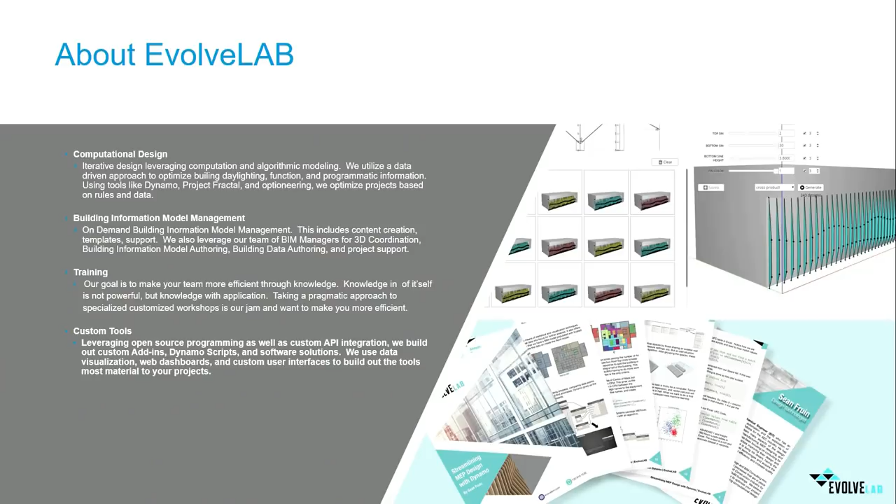Highlighting the client today, we're going to be talking a lot about DTJ Design. They're a client in Boulder, Colorado, my hood, backyard. They do a lot of really cool stuff in the architecture and landscape space. Probably one of the best landscape design companies I've ever seen. Really, really impressive stuff.

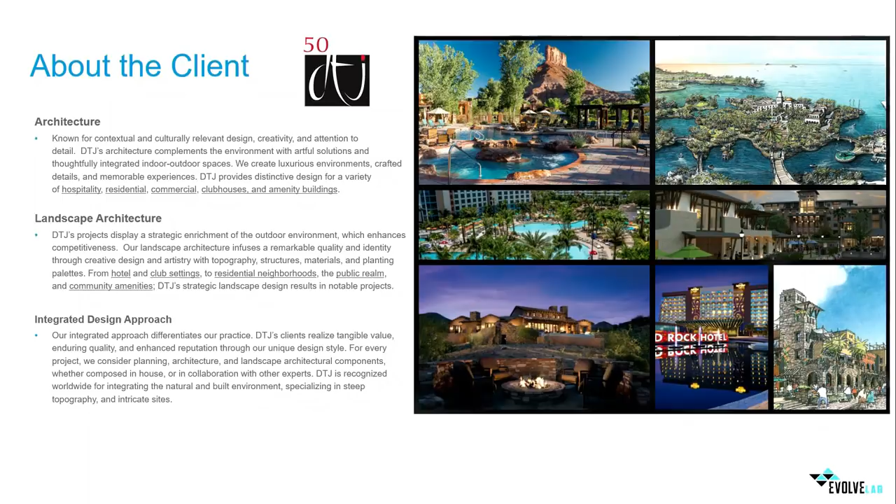Today we're going to be looking at understanding what challenges come with adopting BIM for unconventional projects, learning how to use multiple BIM platforms to synergistically overcome performance issues, learning how to capitalize on BIM for large unconventional projects, and learning what best practices exist for managing complex geometry.

So, an introduction to this. I basically was getting beers with the principal at DTJ Design probably 4 years ago, and he's like, 'Hey Bill, we're getting ready to implement BIM in our firm.' And I'm like, 'Cool, I can help you out with that.' He's like, 'Yeah, we're trying to set up our Revit templates and content and start working on projects.' I'm like, 'Sweet, we can do that.'

So I went into the office and they were like, 'Hey, we're doing this Revit implementation.' And they started showing me the types of projects they worked on. They're showing me these cupcake buildings and these crazy water slides and crazy mountains that they design. And I started scratching my head and getting super anxious and nervous.

And I'm like, 'Okay, can we start with like a multifamily? Like, can we do a townhouse?' And they're like, 'No, these are the projects that have the budget, and we're gonna do it on this. Can you do it?' And I'm like, 'Yes, I can do it.' And in my head I'm like, 'How the hell am I gonna do this?'

And so we started looking at these different projects, starting to understand their process, interviewing their landscape team, interviewing their architectural team, and trying to see how we could start using BIM on some of these crazy projects.

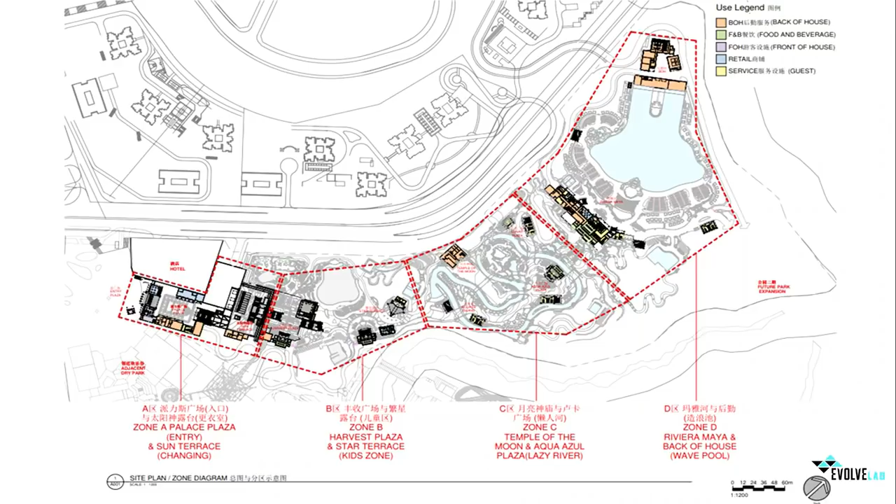Crazy enough, one of the weirdest challenges we had was just simple CAD exports. I thought, easy, we could totally do this, but there were certain ways the landscape team was used to working in AutoCAD with the architecture team. Trying to get exports to show up correctly, with certain information on or off—specifically, for those familiar with the Revit view range, trying to set up where building exports were going to be for a specific cut range was actually really challenging. We had to go building by building, understand where they wanted to see rock work interfacing with the building, and make sure those exports showed up correctly. That was one of the challenges I really didn't expect.

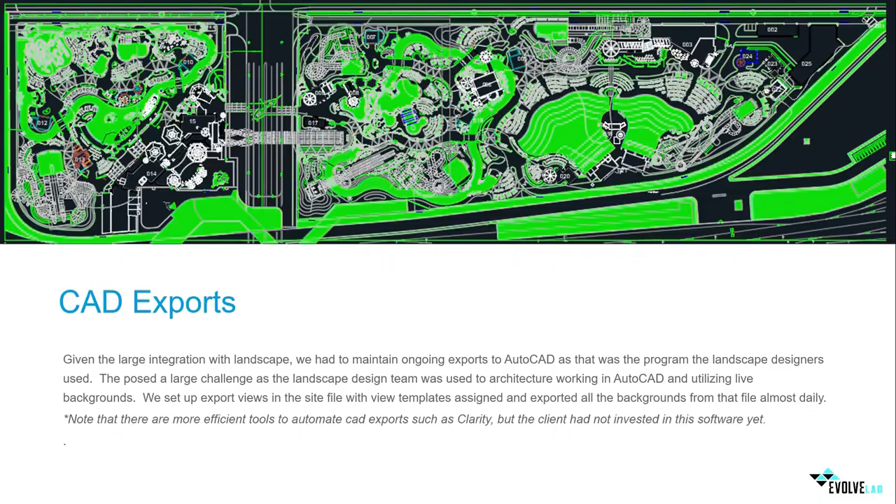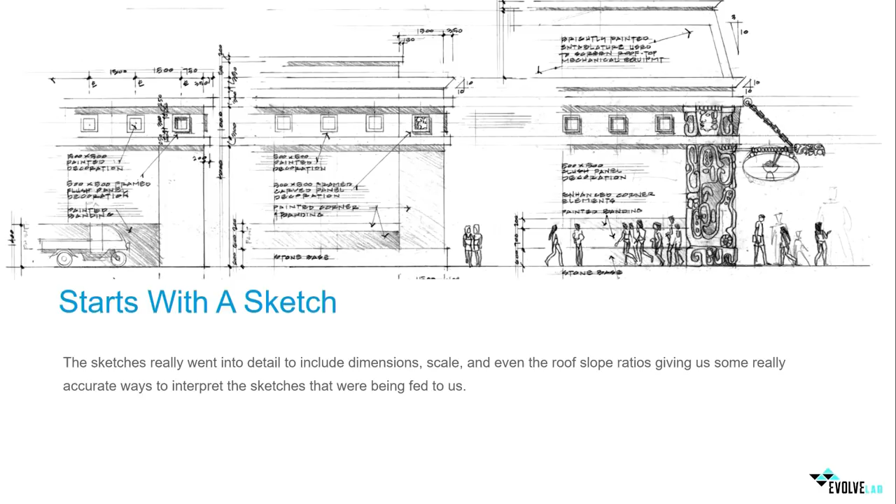The way a lot of these projects start is with a sketch. These guys are some of the most talented artists I've ever seen, with crazy sketches. They start with these sketches and put very detailed information in—roof pitches, dimensions, theming comments, things they want incorporated into the project. Our goal was basically to take any one of these sketches and Revitize them. So on the left you have the sketch, and on the right is that Revit building information model.

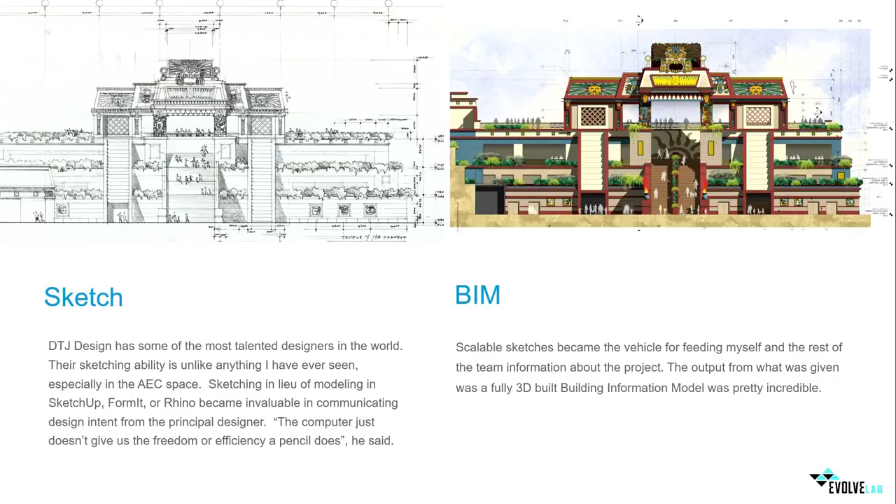Our process had to be very fast—these projects have a very tight turnaround. So we set up a post-processing process with Photoshop: we had layers in Photoshop, we'd feed these artists the backgrounds, and they would add people, entourage, things like that. One of the questions we kept asking ourselves was, there was so much art and decorative elements, how much of this do we want to do in Photoshop, and how much do we want to put in the building information model? There was constant tension trying to think about whether it's faster to do it in Photoshop or faster to apply these materials and objects within Revit.

With this process we basically took a less-is-more approach, applying materials. They had different art pieces and sketches throughout the project, and we started using decals to apply this—this will get more progressive, this is the first one, we'll have two more. We wanted to apply these different images to the building, starting with decals. One challenge with decals is that with any non-rectangular shape, you get black lines floating outside the building. That process fell short really fast. So instead we created different materials within the Revit library and painted the face on some of these. We also created a bunch of geometry related to sweeps and extrusions for roof pitches, as well as a lot of the columns.

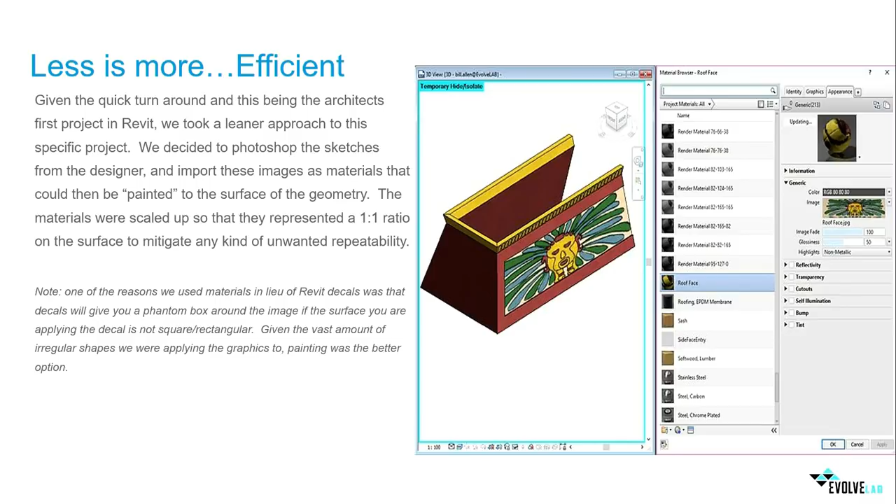The other task I was challenged with was going through and creating very unconventional geometry. I had to model a railing that existed throughout the whole project, and the Revit railing tool just wasn't going to cut it for these ornamental balusters. So we created line-based generic model families that were parametric, and applied those throughout the project—that was really critical. We used simple formulas for those, applying the materials and populating them throughout the project.

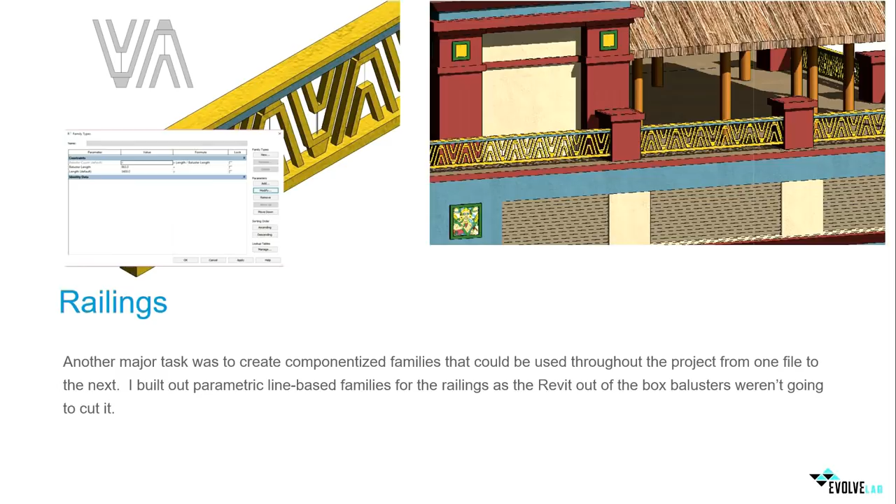We also did this with quite a few different decorative components, different fascias, things like that. I would create all these Revit families and distribute them throughout the team, and they would use them throughout the project. Any questions they had, I'd try to support them and make sure they had what they needed. There are tons of different decorative elements that existed—very unconventional, not your typical Revit roof or fascia.

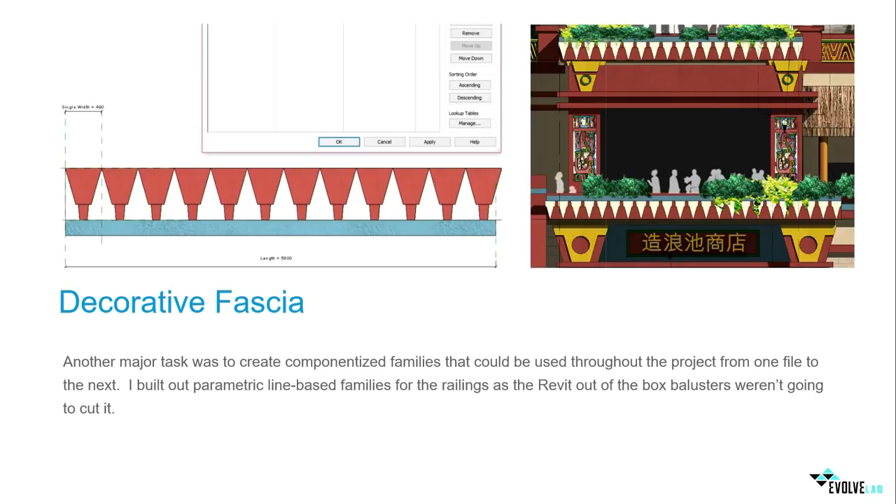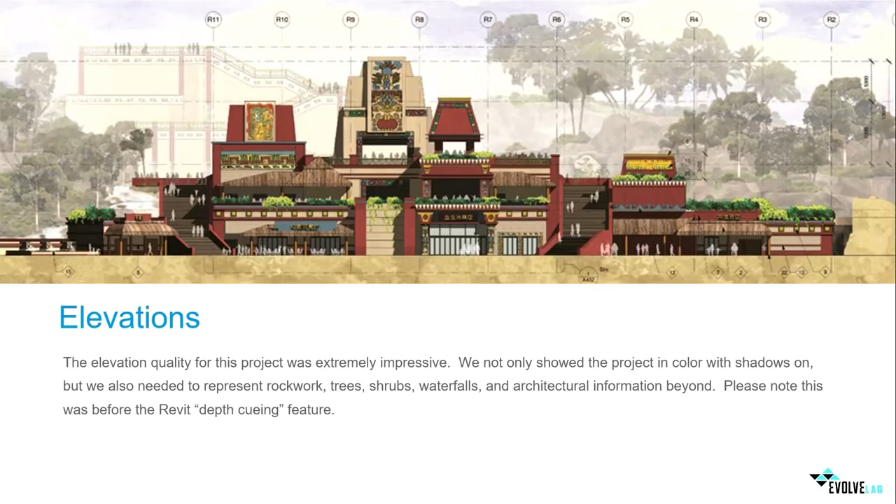We also had to illustrate these elevations. Going through the process—this was before Revit had the depth cueing feature, where you can change the fading or gradient for imagery in the background. So what we ended up doing was illustrating, cutting these as different elevations, bringing them into Photoshop, and changing the transparency. There was a lot of rock work, theming, and entourage, so it was a constant tension of what to model versus what to Photoshop.

This is an image of the building that had the third largest wave pool in the world. Through here they had this stage and a bunch of functional programmatic information in the back—how the space was going to function, the staging, the theming, how the actors were going to come out, and this massive TV that was going to be here. We had to organize all of that with the various AV consultants.

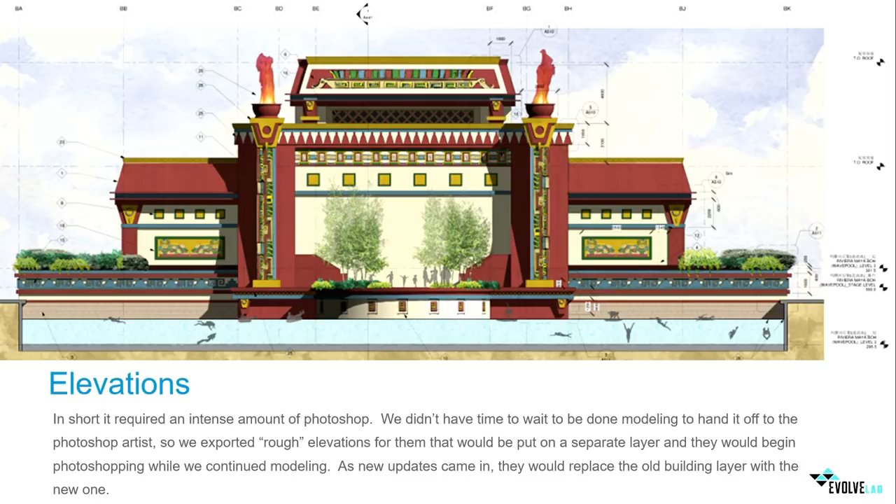This is an example of some of the isometrics we illustrated. This is where the point of what you Photoshop versus what you put in the model really comes into play. A lot of this information we wanted to show up in these views, but if we had to Photoshop it, that was just going to be a nightmare.

It's worth mentioning a lot of these projects only go through schematic design, then get handed off to an architect of record—over in China for this one specifically. So we were only going to take it so far, and we had to understand how much time to invest in modeling versus letting it be translated over to the architects of record. In this example, if we were Photoshopping everything, it would have lost a lot of the value of these isometrics.

So we really wanted to make sure we were using a modeling effort, applying materials, actually putting this information in the model so we could get these types of isometrics. We used keynoting, tagging, and embedded data for all the smart documentation you use with Revit on these projects.

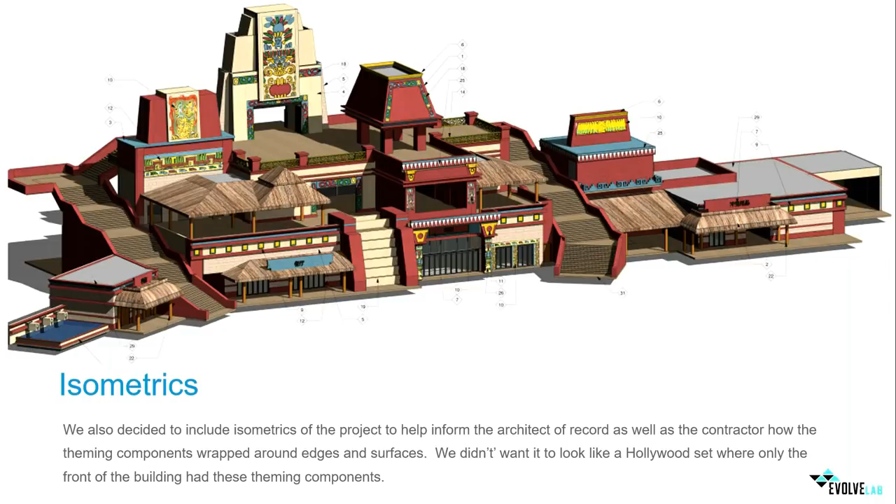This building specifically was one I had to work on. It had one of the largest grade drops, as I mentioned at the beginning, but this specific area was insane—they had this massive escalator and then stairs, creating a huge drop from one side to the bottom. We had some really interesting architecture up on the top. Going through this process, one of the challenges was, again, a lot of unconventional geometry, like these roof structures that existed over the escalator.

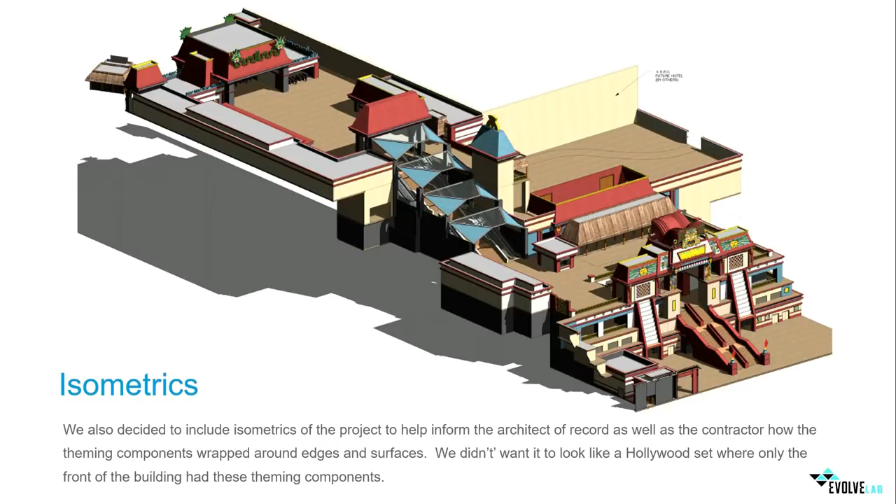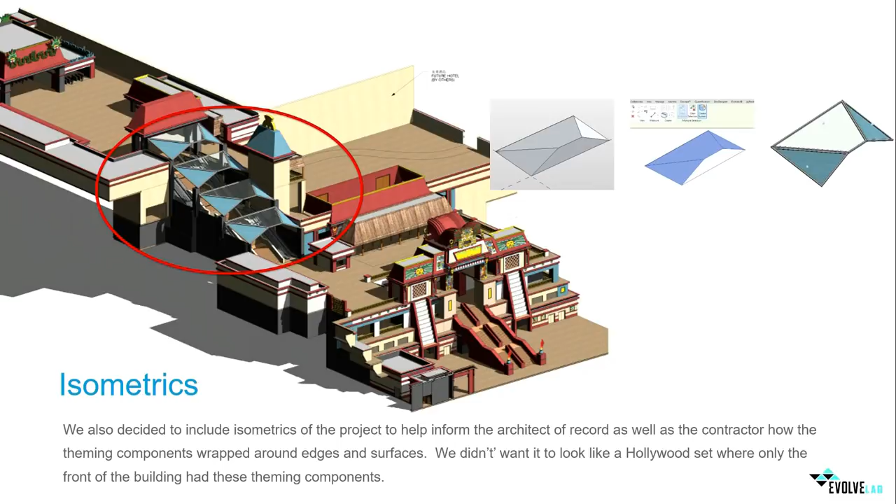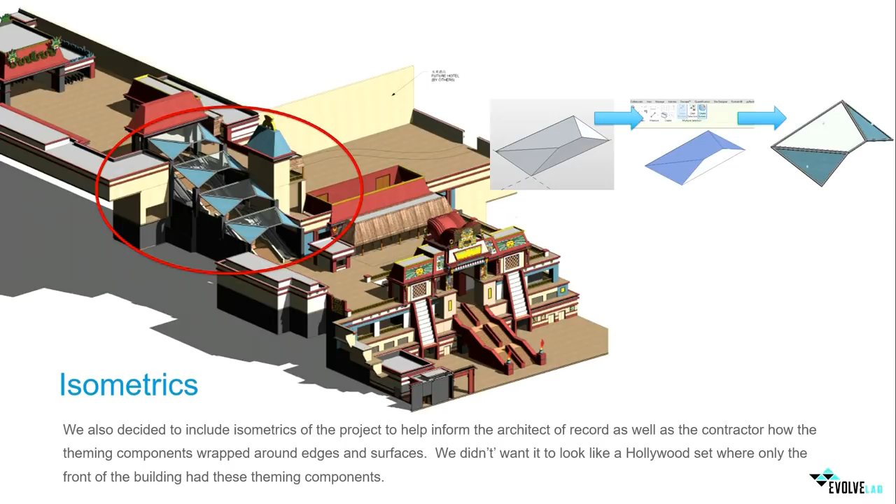A process I used a lot in hospitals, which you're probably familiar with, is to create a conceptual mass family, make it parametric, bring it into your Revit model, and then do a curtain wall by face or curtain system by face. That was one of the processes we used for modeling some of these structures—using the Revit Conceptual Massing environment. I call that Autodesk's best kept secret. Even people who've used Revit for 10 years have no idea it exists. So for those who don't know, that's the Revit Conceptual Massing environment.

We also had all these canopy shade structures, and we were trying to figure out the process for applying a lot of this imagery to these models. So what we would do is actually use a lot of the models in realistic view just to try to get the materials to show up.

This posed a huge issue for performance. The models got very, very slow, especially with the size of these building files. So we would constantly go back and forth between hidden line and realistic mode, trying to get the presentations done but also trying to model. Some of this stuff we had to see in realistic mode so we could model. That became a really big challenge for us personally.

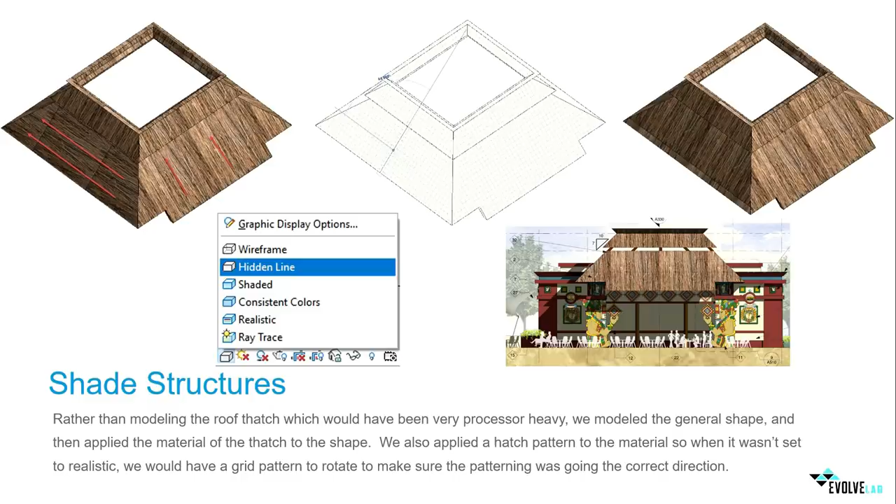We also had these crazy columns, like figures holding corn and diamonds and all kinds of crazy stuff, and I was trying to figure out how in the world we were going to model some of these decorative elements. The way we did that specifically on this project is I used the wall profile tool. It gave us these cutouts, which was a very tedious process - I'll show a better way to do this in a little bit. Basically we did a wall profile, cut it out, applied the material to it, and that gave us our elevations and isometrics.

For this part, we had to go through detailing, dimensioning, and documenting this information. You'll notice there are Chinese translations in here, as it's a Chinese client, so we had to have a translator on the project helping us take all the documentation and translate it to Chinese. Side note - a lot of things I didn't expect is that Revit also struggles a little with some of these symbols, specifically from a formatting standpoint. That was also a major challenge, trying to find fonts and get formatting correct so this information showed up correctly.

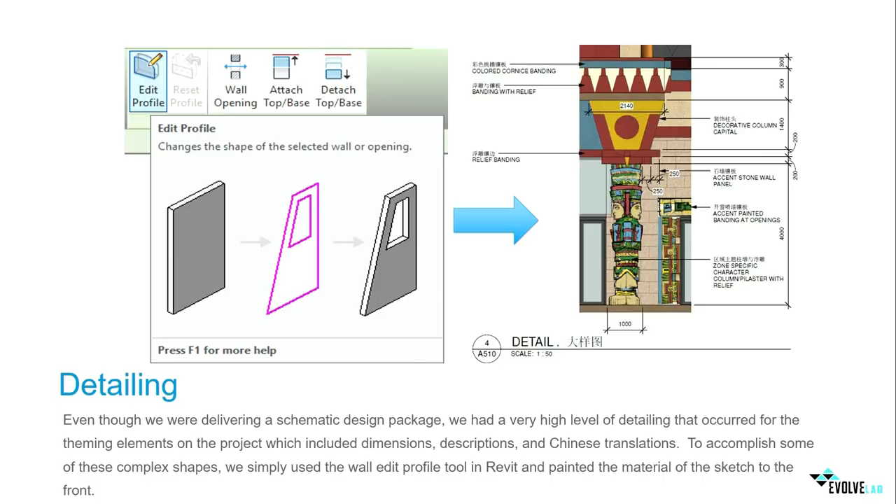The other big value add with Revit and BIM is the data. This client, when they would go through this process - they have thousands of lockers in this massive water park. Think of the lockers at your local water park. When you start talking about 420 acres of theme park attraction, there are thousands of lockers, thousands of plumbing fixtures, thousands of spaces with different uses.

So when we were going through this, what we really wanted to push - and I was pushing them on - is that we absolutely have to leverage the Revit data. As a side note, the way we set up this project is we set up all the buildings as separate Revit files and then linked them into a master site file. That's the best way, and I'll give an example of how not to do this in a bit. Basically, any of this information has to exist in your master file, so that when you link all these together, you get all the data from all the buildings.

We also used Dynamo quite extensively on the project. As a side note, I've chatted with a few people here at the conference, and they were like, isn't Dynamo just for twisty towers and crazy bridges? I strongly recommend, if you haven't yet attended any of Marcelo's classes on Dynamo, he shows some very good practical uses for it. With that, we used Dynamo to leverage a lot of grunt work - sheet creation, view creation, and automating the CAD exports.

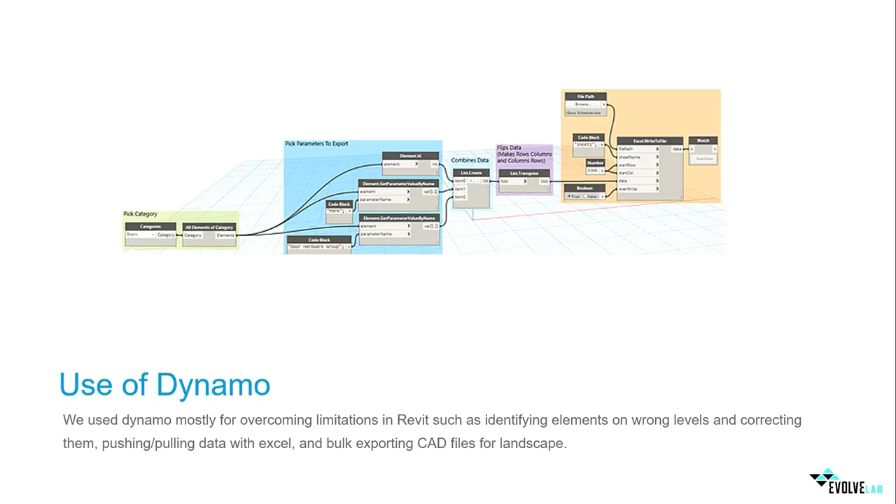So this was the first project we did for DTJ Design, the Chongqing project. The second one we did was this Leyenda Del Mar water park, in Kaohsiung, Taiwan.

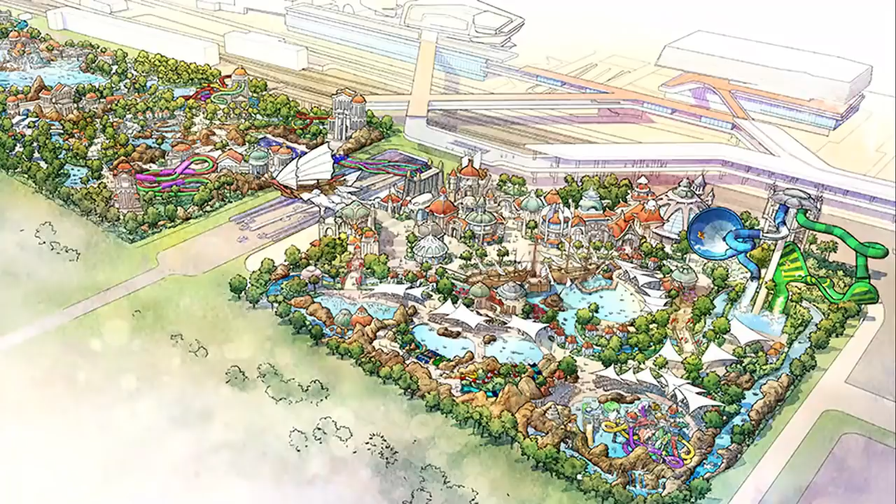This project was really unique and challenging for multiple reasons. It had even more unconventional geometry, like this massive ship in the center. Instead of just having a Mayan theme, it had 3 different themes. Before, we were able to take some of these Revit families and information and populate them throughout all the buildings, but now we had to start creating unique theming families for all these different elements for different parts of the site and applying them to those.

The three themes this one had were this lost civilization, the Kaohsiung secret wharf, and then the land of legends. So these are the different themes that existed, and how we had to start thinking about organization of the project, how we were going to interface with the landscape and civil team, and how we were going to interface with the ride consultants.

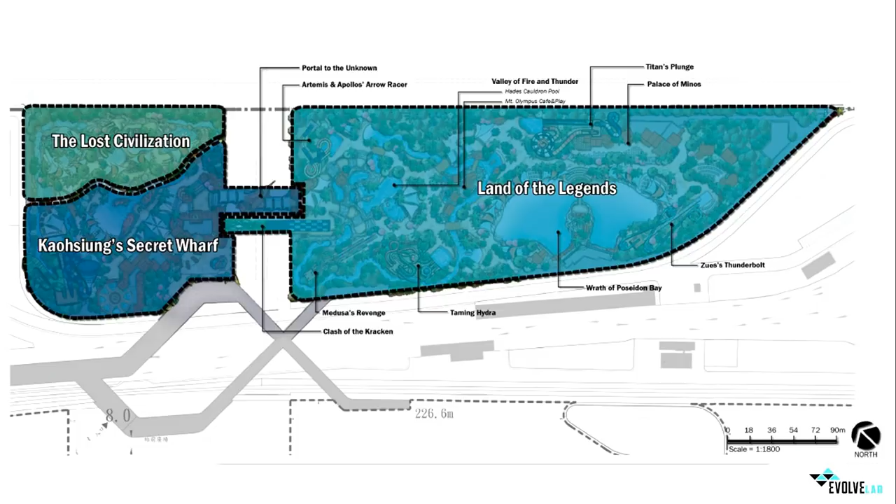As well as how we were going to actually structure the content for this project. So this one, they came to us and started showing me some of this imagery. I was like, oh my goodness, how in the world are we going to do this?

Shout out to Paul Aubin too. He has a really good class on designing classical architecture. We ended up buying his book when we were working on this project, and that was super helpful. As a side note, there are a lot of really smart individuals here at this conference that I strongly encourage you guys to network with, because things happen like this where it's like, man, how are we gonna do this? Oh well, I ran into Paul and he has this book and I took his class 2 years ago. There's a lot of really good resources here, and that's one of the resources we used for this project specifically when we started thinking about this.

This one had a similar approach. You guys will notice a common theme, no pun intended. We have these sketches that exist, the architect or designer would go ahead and sketch these out, and then we had to basically Revitize that information. So again, this is kind of the process.

Their comment was that the computer just doesn't move fast enough for them. When they're designing and they have this creative spirit, they really want to be able to just go pen to paper. They also use these Wacom tablets where they sketch digitally, and then we bring that information in as well. So this is an example of the sketch on the left, and us basically trying to Revitize the information over on the right.

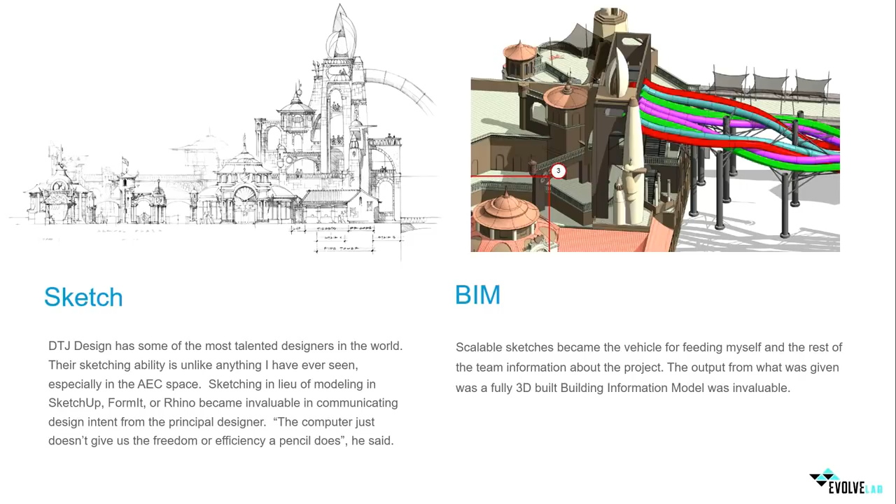This is some of the classic architecture that we started modeling. We basically used a series of sweeps and extrusions, really leveraging the array tool, thinking about the different components that needed to be arrayed around the different dome structures and the columns that existed. There was a lot of really decorative information in a lot of these projects that we had to go through and model.

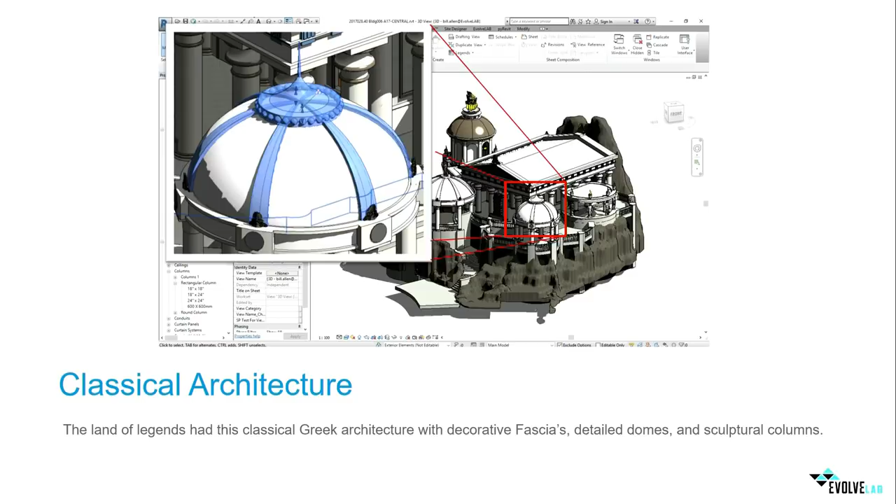The other thing we really wanted to push is, like with the last project, the Mayan water park, we didn't want to just do a series of wall profiles. We wanted to really try to push the limits and see what we could actually do with the program. So for this one, I'll show some examples of that.

But again, basically just using a series of sweeps and arrays. When you think about some of these structures, when you take a step back, they look very complex, but when you break them down piece by piece, they're really not that complex.

As an example, really all we're doing is creating an extrusion and then arraying it around, or we might create a profile for this sweep and then array that around. So when you're thinking about how to model some of this stuff, if you can break it down into a kit of parts that you can utilize and replicate around, that's basically

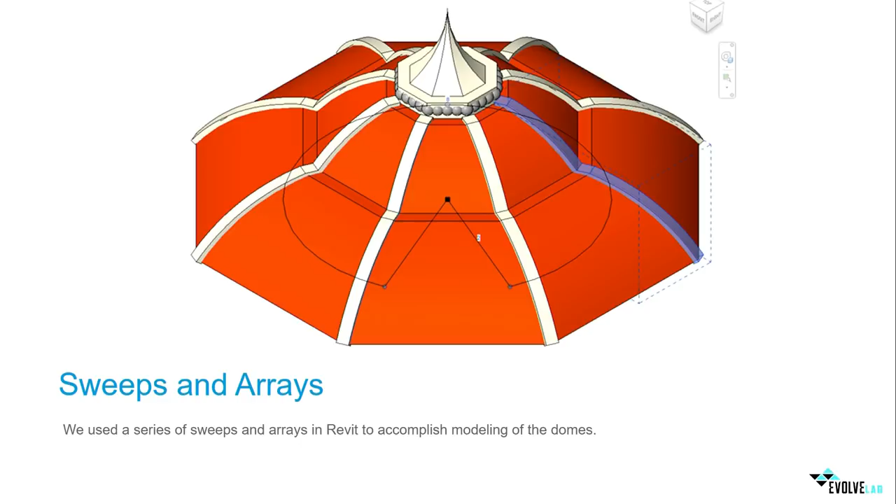the process that we use for a lot of these type of structures. This one we definitely, instead of just using Revit, wanted to try to leverage other programs for their different uses. Different programs are better for different things.

One of the things we did is we used the topography from AutoCAD, the civil engineer and landscape group would do all their design in AutoCAD. Then we would bring that information into SketchUp to start extruding, like this rockwork here as an example. We would extrude the rockwork from the AutoCAD file. Then we would bring it into Mudbox and kind of sculpt it to give it that rocky feel and shape, and then bring that into Revit.

For those that don't know, Mudbox is really what a lot of designers use for theming of different elements, specifically in video game design and other things. It kind of gives you more of a sculpting type of feel with some of these programs.

Again, Revit is a building information modeling program. It's not necessarily a rockwork modeling program or a Maya-type modeling program. So you want to think about how you can start leveraging some of these other programs specifically for what they're good at. That's what we specifically try to do on this project.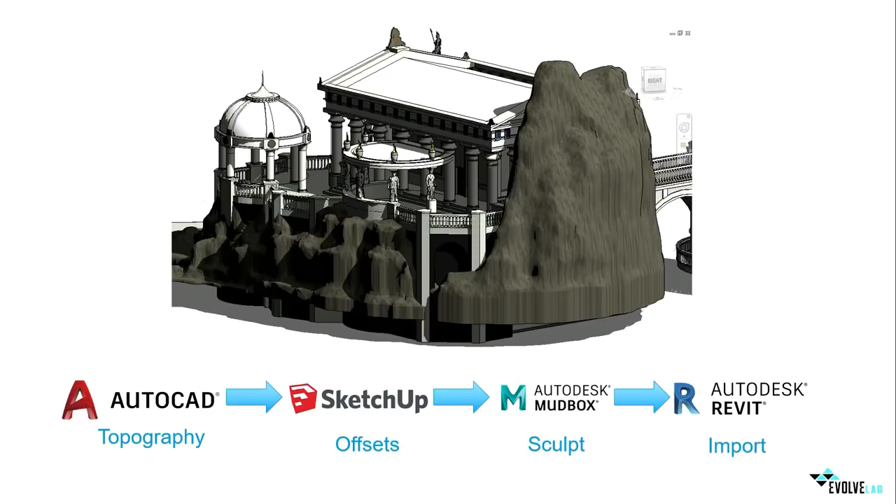Again, we used a lot of parametricism with a lot of the components. We were able to drive these using different radii, profiles, different rigs that we could model and edit parametrically.

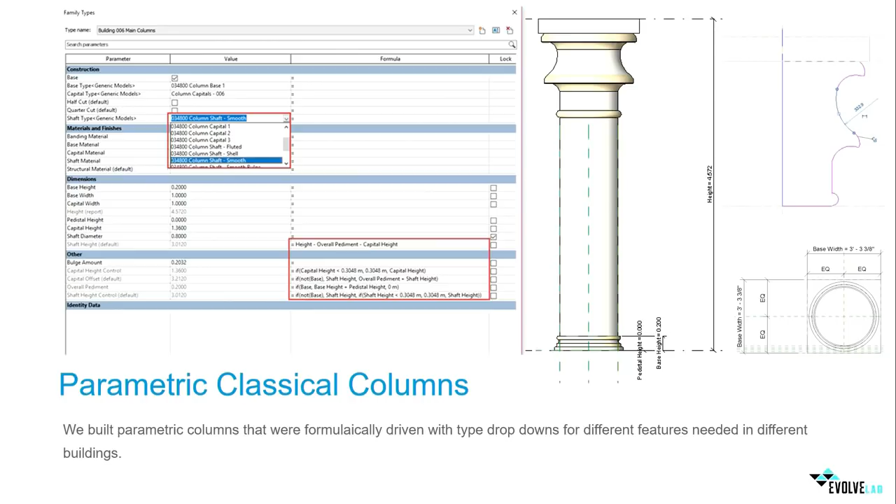But then the other thing we did is we had different type selectors, so we'd have nested families. You'd have your column family, and then we would nest the top or the base, and you'd be able to swap out that type of capital element at the top or different elements at the base. So going through modeling a lot of this as a kit of parts that could be replicated throughout the project, and then you can easily swap those in and out by using the type selector and nested families.

This one was interesting. They're like, cool, we want to model a ship. And I'm like, oh my goodness. So trying to think about how we would be able to model a ship, I was just chatting with, shout out Steve Michele. Steve Michele's in the house. Steve, can you raise your hand?

So Steve's doing some really cool stuff, but we're looking at trying to model different ships and other information as it relates to the Revit model. There's no ship category

in Revit. And so the most abused categories that exist in Revit are specialty equipment and generic models, right? A lot of head nods. So one of the challenges we were trying to think about is how do you categorize this information? How do you schedule this information? What information is repeatable versus an in-place family?

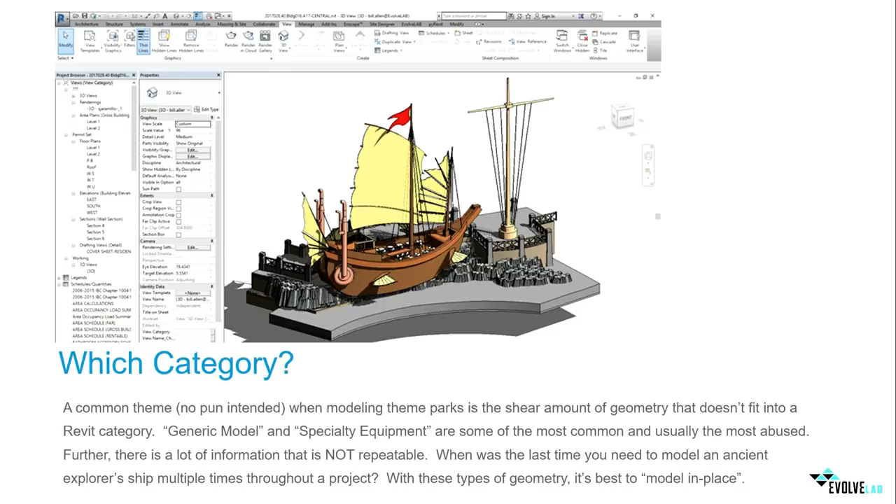As an example, you don't want to make a locker an in-place family, something that's repeatable, a lot like the columns. Those are things you want to be able to model as a family that is not an in-place family, like a system family or a category family. So a lot of the ships and other specialty information that existed in just one location, we ended up using typical sweeps and extrusions to model those, and we basically put them under the generic model category because there really wasn't a better category to put them in.

I feel like the void tool in Revit is completely underutilized. There was a really good class probably 6 or 7 years ago here at AU called Into the Void. Phil Read taught it, and it talked about how to leverage the Revit void tool for different elements. So you could model, say, the ship sail as a solid extrusion, then use the void tool to cut the information out. These are some of the tools we actually used to model a ship in Revit, which is just crazy to me, but that's how we did it.

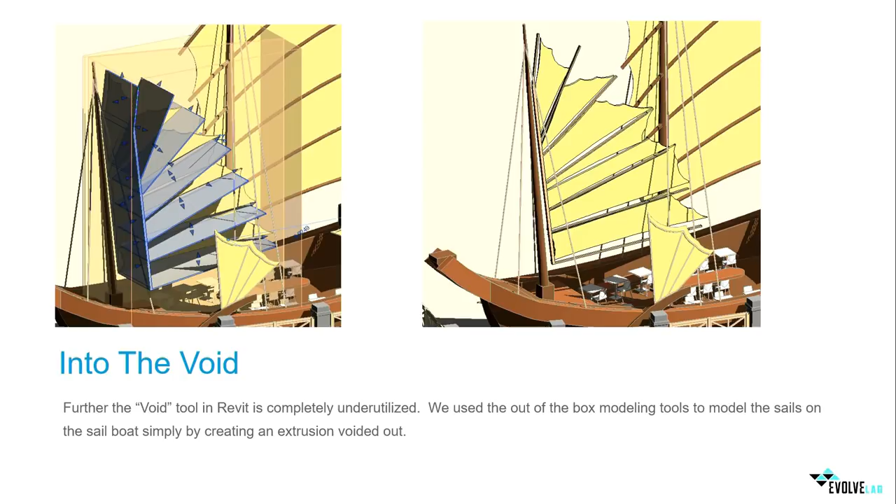Again, we didn't want to just use the wall profiles for the columns. We wanted to try to have some kind of three-dimensionality for some of these sculptures. So this was one of the things we really wanted to address: if we're issuing these isometrics or renderings, how do we model this information? How do you model a dress? How do you model a hand? These are things that are really, really challenging to do.

We ultimately came to the conclusion that Revit probably is not the best program for this. So what we ended up doing is basically Frankensteining a lot of these parts. We would grab different elements that existed either online or model them ourselves, using Mudbox, 3ds Max, or SketchUp. The white paper really shows extensively this process.

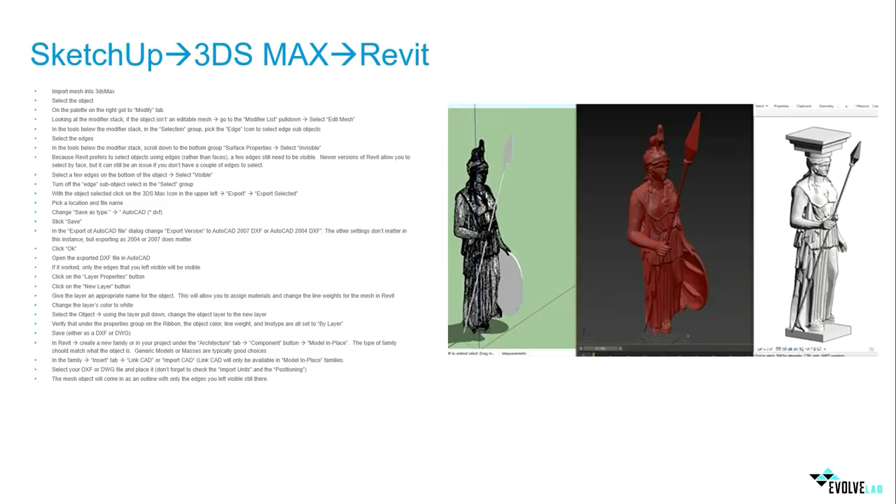I don't think it's a good use of our time for me to read all these bullets and every click and pick on how to do this. But in the white paper, I go through systematically how you can clean a lot of these up. The point being, 3ds Max really became our tool to interface before we brought it into Revit. That was the tool we used to clean up the edges, because if you don't do that, it triangulates it, like it does over here on the left. The other thing is you run into serious performance issues as well. We went through this kind of tedious process, but it was really helpful to get us to the end result of being able to bring this information into Revit as a real Revit element.

We also had a series of decorative details, and these basically weren't so parametric. I think the other thing is, for me personally, I'm uber nerdy and I just want to parameterize everything. So sometimes taking a step back and thinking, is it a good use of my resources and time to spend the next 6 hours parameterizing this decorative detail? It wasn't. So just trying to think about that, as well as putting the right resources where they need to be.

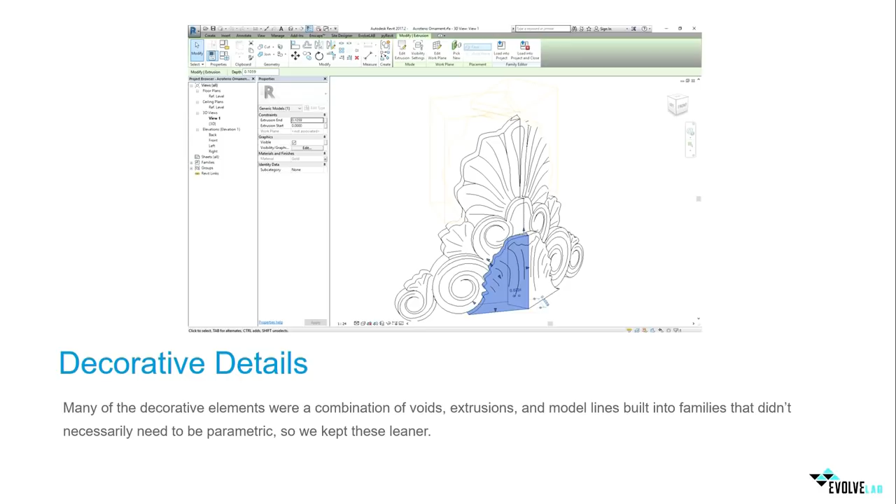The other major challenge we had on a lot of these projects were these ride towers. On a lot of these projects, we're not designing the rides. It's a ride consultant, someone like ProSlides, that designs these rides. We design the ride towers. The challenge with this, similar to the manufacturing world, is a lot of these people use their drawings for fabrication of the slides and different rides, so they're modeling every stinking nut and bolt, just like a manufacturer does. As you guys know, that's not really good for the building information model, especially from a performance standpoint.

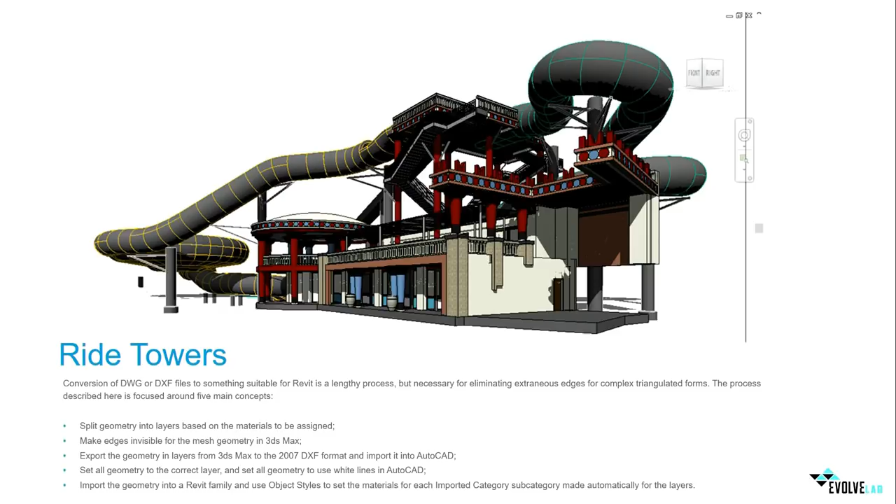So what we basically did is go through a similar process to what we did with the columns. A lot of their files come in from SketchUp, so we'd export the files from SketchUp to 3ds Max, go through a series of clicks and picks for the ride towers, and then bring the information in as native Revit geometry. I don't think it's a good use of our time to talk about every one of these clicks and picks, but the punchline is really just trying to make sure we clean up the files so they can become usable in the Revit model.

Prior to going through this process, we would bring in a SketchUp file from the ride consultant, and it would just take a good 2 minutes just to link it in and then pan around. It was a huge time suck. So even though it might take us 30 minutes to clean up a ride file, it's definitely better for the longevity of the project.

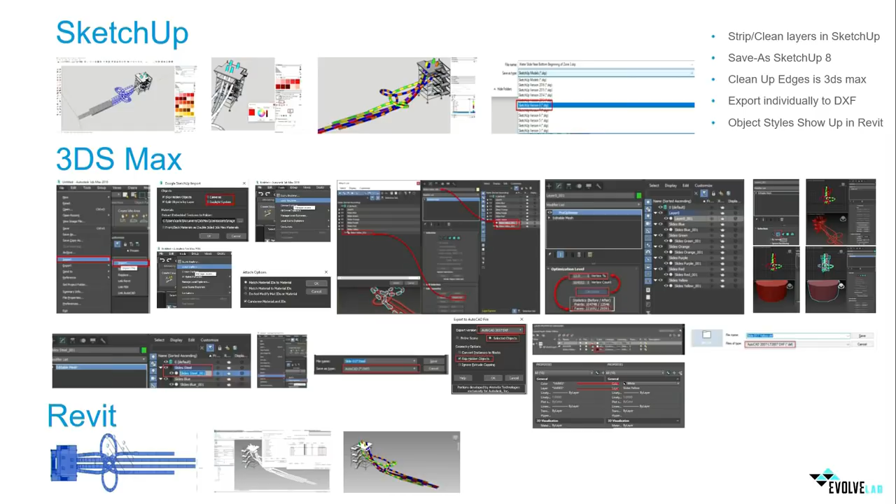And this is kind of showing the information inside of Revit as real Revit categories, these different subcategories that exist as their geometry.

Another thing we tried to do on this project, and I'm still trying to figure out if it's a good process or not, I'm not sure, I'm still figuring it out. But we basically have, throughout the project, the same building with different themes.

So basically what we did is we modeled all of the information that is static, that doesn't change, in Revit in the main model, and then we used design options and put this information on its own design option, then linked that into the various files and changed which design option you wanted to see.

The reason I'm not totally sold on this process yet is because the theme is based on its location, and every single view looking at this building file, you have to tell it that it's that theme. So if you're in your floor plan, you have to change it to that design option, and when you're in the elevation, you have to change it too. It becomes kind of an inconsistency that could exist versus just having it be one file.

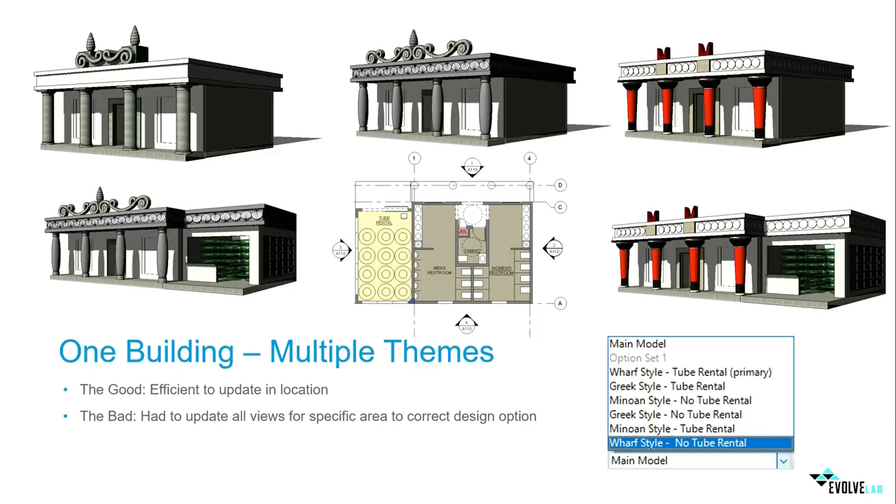Okay, this one is a confidential water park, and I can't say who the owner is, and I can't say where it's at. But I did get what it looks like. This is it, this is the file right here.

So this is the project, we'll call it Exhibit A. Basically, again, just a lot of building elements existed throughout the site, but specifically this was the most recent one. They're like, cool guys, you did these other 2 projects, we want to model a mountain.

And we have these wave pool attenuators and storage, and we have paths coming in and out of here, and we have waterfalls, we have structure, and they wanted to take this all the way through and think about how that was going to happen specifically from a construction documentation standpoint.

And so this project, in a sense, we tried something different, and honestly, to be completely honest, I have no idea why we did it this way. At some point we decided we were going to document a lot of this information in the site file. So this is an example of what not to do.

So we had all these separate Revit building files, but we started thinking about using linked views for the site file and doing all of your documentation in that site file. This became a big mistake.

As we started going through the process, the linked views became corrupt. We started getting really inconsistent results, and again, there was a lot of performance issues. So this is an example of what not to do.

We strongly recommend documenting everything within your respective building file, and the only documentation you ever bring into that site file is your overall site plan and any information you want to schedule. So big lessons learned on this one of what not to do.

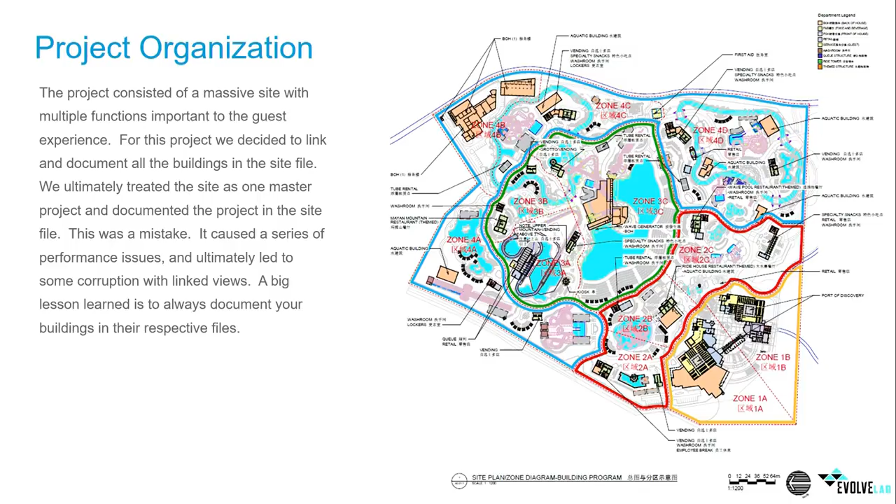Again, there's a lot of architecture on this one, a lot of integration with rockwork. We had these crazy mountains, and we wanted to experiment with a different way of doing this. Part of our scope was to locate major elements within this mountain, to do conflict resolution and clash detection with the different aquatic vault and back of house programmatic elements. We had to have a 1 meter clear between the rides and the vaults.

There's been a lot of stories of people riding rides and putting their hands up, and even though the roller coaster may fit through there, hands may not. So you have to make sure you have some kind of clearance between some of those as well.

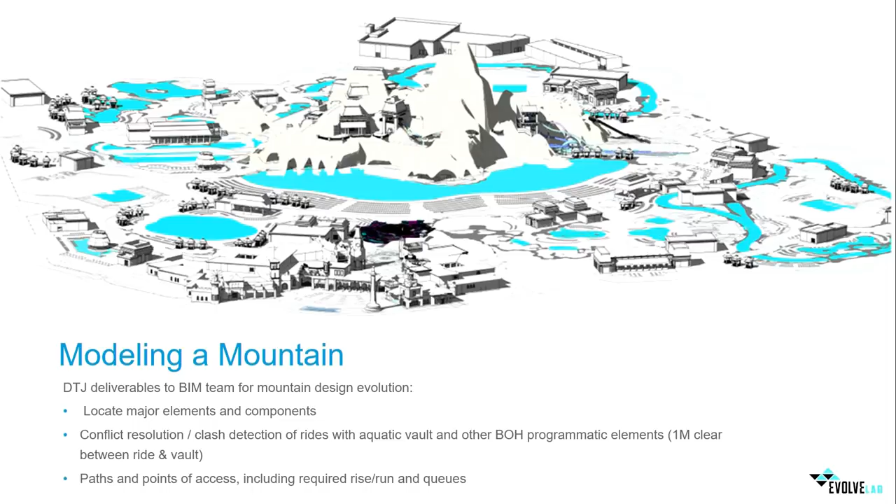The other challenge we had too was paths and points of access for this specific project. So for this one, we decided to try to do it computationally. We had a lot of organic rock work, and we were also going to be having updated mountain chains, so the landscape civil group was still working on the mountain, but we had to start modeling it.

In our minds, for those who haven't used Grasshopper or Dynamo, just to give you a point of reference here, on the left, what we could do is start referencing their 2D information, the perimeter of the mountain. In here, you use this process called set curve, and then you can extrude that up.

So then as the landscape team continues updating their backgrounds, you link it in, and it updates your mountain, the extrusions that go up vertically. Through that process, that was kind of our logic for using this.

Also, we wanted to push the limits of designing it parametrically. I think another example of what not to do is we took it too far computationally. The ditch I can fall into is like, well, let's just keep going, building more scripts and more components to this computational effort. At some point, you have to stop and go, what is your end result?

I think that's another lesson learned we had, is we probably took this too far on the Grasshopper computational side of things.

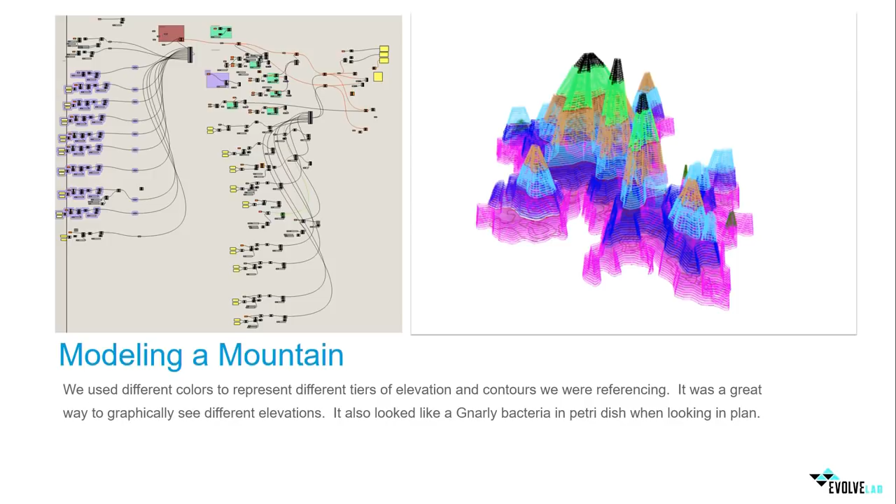As a side note, it looks really cool, like a gnarly Petri dish. It was really interesting from a plan view. But the thing that really helped us from the color standpoint is to understand the elevation.

So when we're doing contours, typically you have an elevation that exists on a contour. Actually showing the gradient colored was super helpful for us to understand elevations of the mountain specifically.

The other thing we had to do is get quantities. So this is a 3D representation of the mountain, the structure, and they wanted to ask us what was the mass of the volume of this mountain.

The other thing that Grasshopper was really instrumental for is you can get that with this type of geometry. You can actually get the mass information, which to my knowledge you simply can't do with Revit out of the box. You'd have to use possibly Dynamo to get the volume of it.

But we ended up doing it with Grasshopper and getting the quantities for the mountains. That way they understood from a cost perspective how much quantity of mountain they were going to have for whatever material they were going to use.

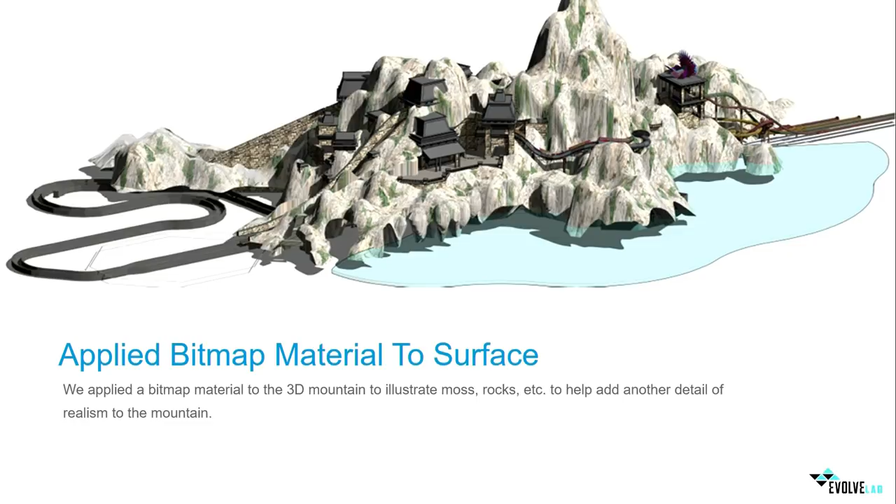One thing we tried to do was take a leaner approach. They were talking about moss, waterfall features, and all kinds of interesting elements for this mountain. So again, taking a less-is-more approach, we ended up just taking a bitmap of this rocky, grassy terrain and applying it to the mountain.

We had a series of cave penetrations that we had to coordinate with all the programmatic information in here, like the wave pool attenuator. We had to coordinate the mechanical information as well as a lot of the egress information. There was a series of paths throughout the mountain and the project. Specifically, this team used to use a 2D process to coordinate egress and paths.

As we started modeling the mountain, they would say, here's the sketch, go model it. Then we'd say, it doesn't work. What do you mean it doesn't work? Well, look at this pathway, then this ride coming in over on this side, and this wall setback. Looking at it in 3D really helped with a lot of the functional information related to paths and egress specifically.

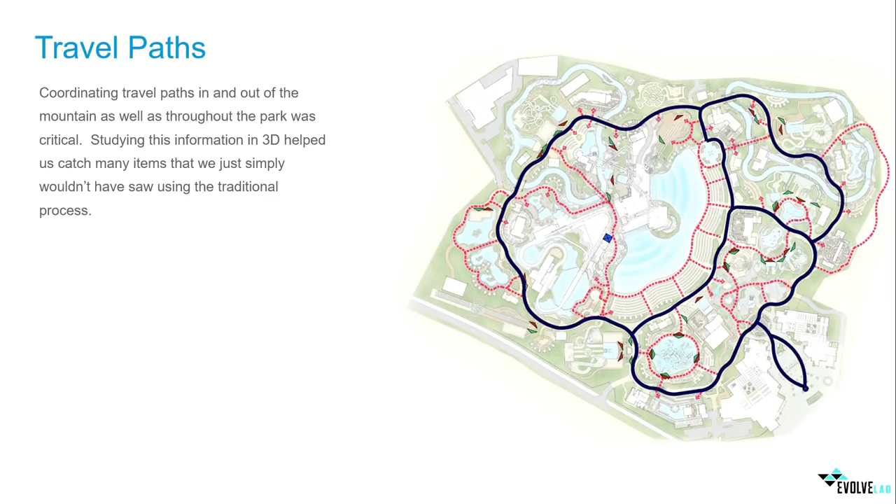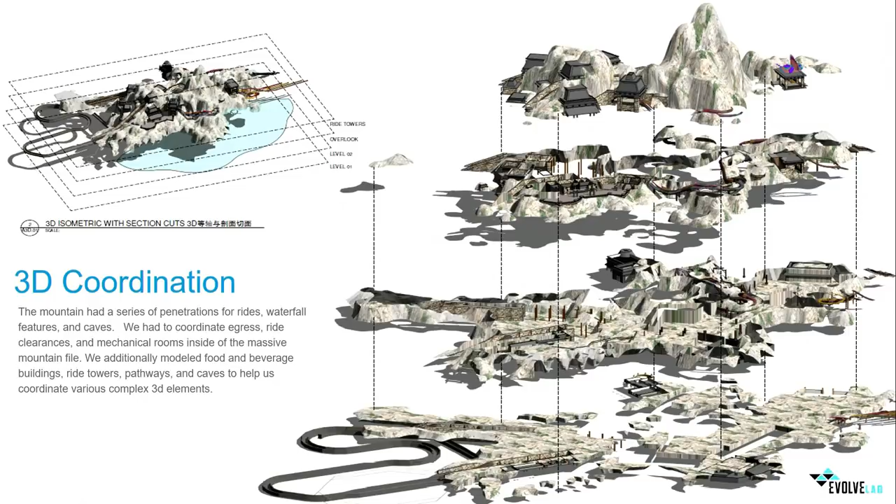I think this is one of the things you just don't get in a 2D process. Many of us have been in Revit and BIM for a long time, but this is another point showing the function of a model and how you could leverage it. Because if you tried this as a sketch in SketchUp or AutoCAD, it would take forever to model all this information, especially in this context. But with Revit, you could just cut your sections and have that information.

So after we did these three theme park projects, we realized none of them had a template. We came in and I built out all the Revit templates for the commercial side and the residential side - they ended up using Revit for more traditional architecture too, not just theme park projects. But we wanted to think about what goes into a theme park template, taking into consideration a lot of performance information.

We had model maintenance data - like when the project had warnings last reviewed, when it was last audited, purged, or compacted, or when the central files were created. We started creating a log of that information, as well as who was managing that model.

We also had design team information - ride consultants or anybody from the landscape group, and their contact information. This was the landing page when you opened it, so we tried to have very useful information there: project status, client name, etc., and then the project browser.

The other thing we debated was file organization - are we setting these up by building, by zone? Obviously the campus approach wasn't a good way to document it, so we had conversations. Basically we set it up by building for each individual file, with certain information associated to that building, then linked into an overall campus model.